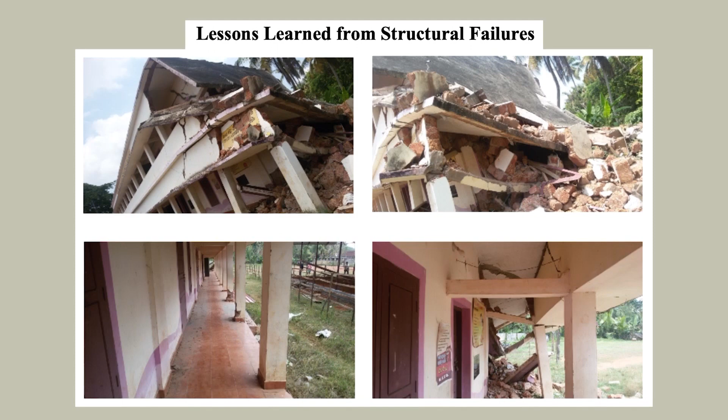RCC is not there, no kind of reinforcement is there, no concreting is there, but only clay bricks. And the columns failed under shear failure. The beams are of very thin cross section. The reinforcement, steel reinforcement given in the beam was not adequate. So we can say plenty of reasons like that.

And in addition to this, before constructing the foundation, they removed a tree from the place. So that gap was there. Refilling the place where the tree was initially standing was also an additional problem. So in short, the entire building came to earth because of several reasons.

One, the soil was not considered for design. Second, a design which was available elsewhere was brought to the place and executed there. Third, there was no kind of structural design. The columns were made of bricks. The beams were not adequately reinforced, and slabs also were not adequately designed. So we can say plenty of reasons just like that. This is a typical example of structural failure which happened in the place.

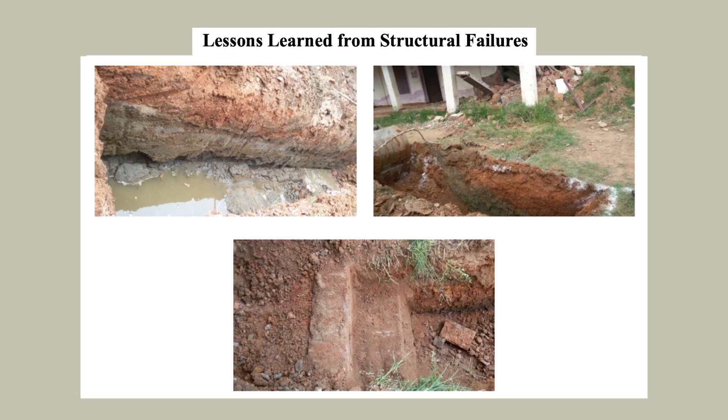You can see when the place was dug down for the soil investigation, the top 60 centimeter to 1 meter layer was red earth filling. Below that you can see a dark color. The dark color is dark clay, and you can see the water table also, which is very high in that place. And in the third photograph, we can see the inverted T-beam foundation, which was of course inadequate for withstanding the load coming from the superstructure.

So this kind of construction has been practiced without much engineering in the place. If you look at the residential buildings constructed there in the recent past, you can see that the foundation is not going deep into the soil. Rather, the foundations of those buildings are standing on the top soil, considering that the top soil is better than the soil below. But without much anchorage, there is every possibility of washing away or toppling down of the structure.

So some of the possible causes of failure of structures, based on this example and other examples available in the locality, may be summarized in the following lines. Wrong choice of land for construction. Many structures are constructed in floodplains. Many structures are constructed in places which should not be chosen as soil for construction. Without adequate soil stabilization, people go for construction. So wrong choice of land for construction, that is one.

Then settlement of soil below the foundation and differential settlement of structures. That is a very common phenomenon. Settlement will be there for structures for sure, but if the settlement is different from one point to another point of a structure, the structure is going to fail for sure. The structure will tilt and there can be cracks in the building, and finally it causes failure of the structure. So this is a major cause of failure.

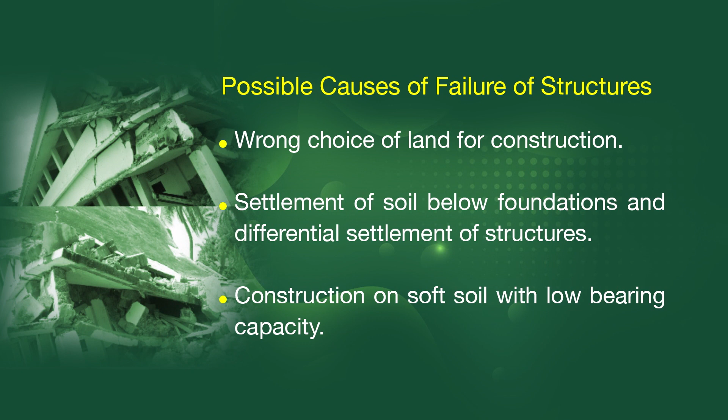Construction on soft soil with low bearing capacity. As we saw in some of the previous segments, the soft clay available there did not offer much bearing capacity to loads. So if you construct buildings on such clay without any soil stabilization, there is every possibility of failure.

Then construction on top soil without much anchorage of the foundation, that is what I was mentioning in the beginning. On the top soil, they construct the buildings after ramming, thinking that sufficiently ramming the earth is good enough to give a good bearing capacity. But the compaction of soil may be good in the beginning, but consolidation is not taken care of. The pore pressure is supposed to go off and the soil will consolidate.

The grains will stand close to each other after pushing away the pore water and the pore gap in between. So that process will take time. It will not happen immediately. So if you fill a particular site and construct the foundation immediately above that, there is every chance of consolidation settlement and building failure.

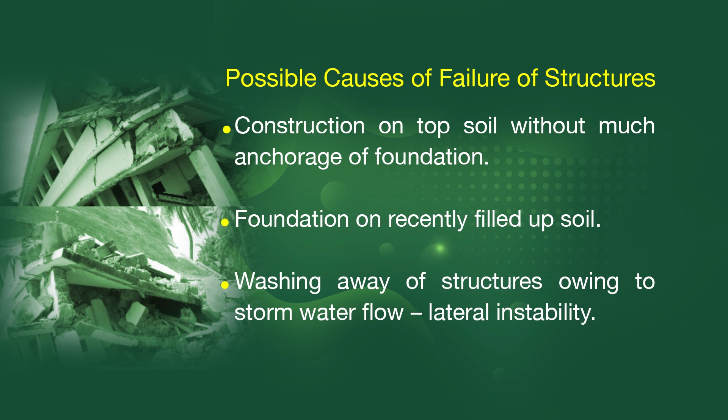Foundation on recently filled up soil. This is also added to the previous statement. Then washing away structures owing to storm water flow, lateral instability. So when the structures are constructed just above the soil without having any kind of anchorage, when there is storm water flow, there will be seepage of soil below the foundation, and every possibility of failure of structures can happen. So the structure may tilt and it may fail.

Then sometimes some of the buildings are having water absorbing building materials. This also was noticed in the place. During several inspections, this point was also noticed. Many of those building materials which are used may be having water absorbing property, and owing to water absorption they may become soft. That is also a cause of structural failure.

Then nowadays people are extensively using RCC, reinforced cement concrete, but without any kind of design based on IS codes or detailing. They use RCC for their foundation, they use RCC for their superstructure, they use RCC for the roof also. I inspected one building at one point of time, and I wondered about the amount of load which they have put in the RCC structure over there. They thought that if you add RCC to the structure, that may strengthen the entire structure.

So there was a 90 centimeter thick foundation given with RCC. Do you believe this? 90 centimeters thick RCC, and so much of reinforcement. Reinforcement was very, very heavy, without any design for sure, but heavily reinforced structure. And above that, they constructed the building, the superstructure, and the roof also was RCC roof. They confined the boundary also with a strong compound wall, and inside the compound they have laid granite tiles or other kinds of tiles. So fully tiled compound.

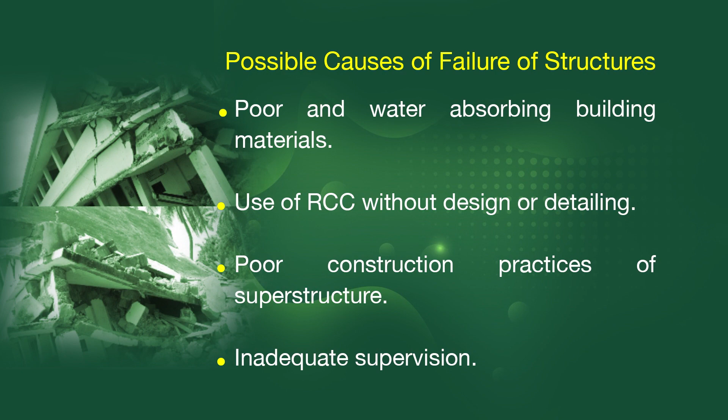Then of course poor construction practice of superstructure. We may look into the facilities which we require in the superstructure, the function of the building, but not the structural strength of the building. And finally, the structure is supposed to transfer the load to the foundation and to the subsoil. So this fact is also not considered while designing the superstructure.

Inadequate supervision: even if the structure is designed by an engineer, unless there is supervision by the same engineer or somebody else throughout the entire construction period, there can be faulty construction practice, and finally that may also lead to structural failure.

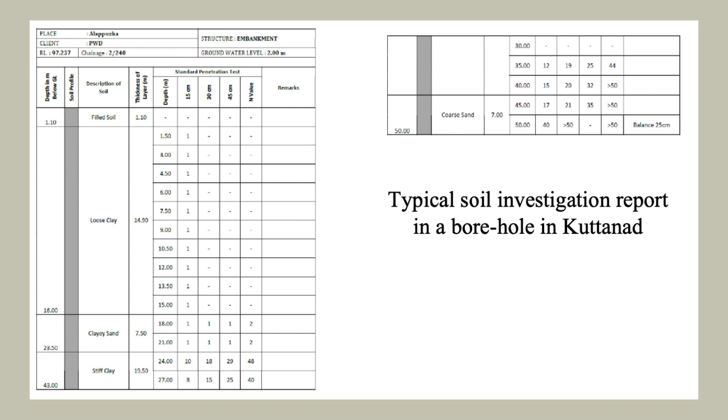Now we can see in this slide a typical soil investigation report of a borehole in Kuttanad. You can see in the top 1.1 meter or so there is filled up soil, and below that you can see loose clay having a thickness of 14.9 meters or so.

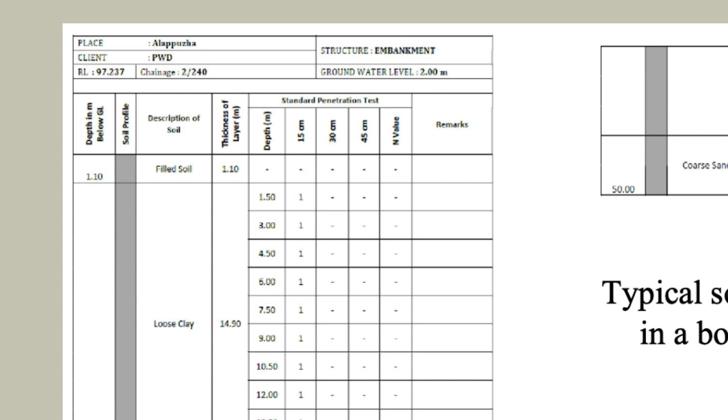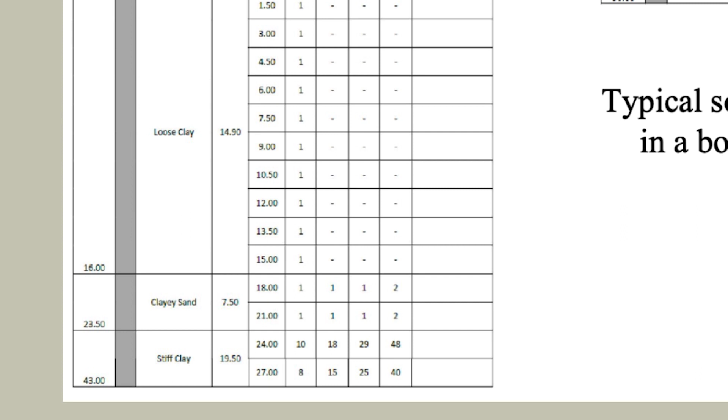Below that you can see clayey sand of thickness of like 7.5 meters or so. Then stiff clay is below that, and you can see hard soil just below that. So, this is a typical kind of a soil investigation report in a borehole in Kuttanad.

The N value, the standard penetration test values, are also reported in the particular chart, but you can see in the first and second layers they did not report even a standard penetration test value, because the hammer is just going down just like that without having even a single blow. So, the number of blows required for 15 centimeter, 30 centimeter and 45 centimeter penetration is treated as the parameter for this N value or the standard penetration test value.

But even with only a single blow, the hammer is going down this much penetration in the top, like 15 meter or more than that depth. But below that you can see the hammer penetrates through that much settlement by 2 blows in the next layer, that is the 7.5 meter layer. Then further when you go down, you can see the number of blows required is more than 40, and finally when you go deeper than 40 meters in the particular site, the number of blows required is more than 50.

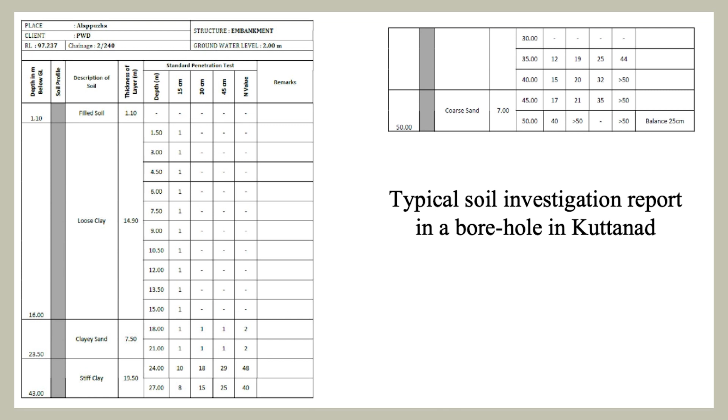And when the number of blows is more than 50, we consider that particular layer as a hard strata, and the foundation can be placed on that layer. That is part of civil engineering.

Now, another typical example is given here, where on the top soil you can see a few number of blows for that much penetration. There is also filled up soil, and black clayey sand is there as a second layer. Then loose clay is there as a third layer, which is much thicker, and stiff clay is there, and finally you can have a much harder kind of strata. Here also hard strata is available at more than 40 meters depth. That is the point which I was trying to bring about over here.

Now, if you look at the soil investigation report of some other sites, you can see that after going down by a distance of 10 meters or 15 meters, there is a 3 meter or more thick layer of shell deposit, and that shell deposit is much good in bearing pressure or bearing load from the foundation.

So, in such kind of sites, many a times buildings of 3 stories or more are founded on that shell layer. At the shell layer, usually the N value or the standard penetration test value is more than 30, more than 40, of that order, and that is sufficiently good for having a bearing capacity of like 150 to 240 kilonewton per meter square.

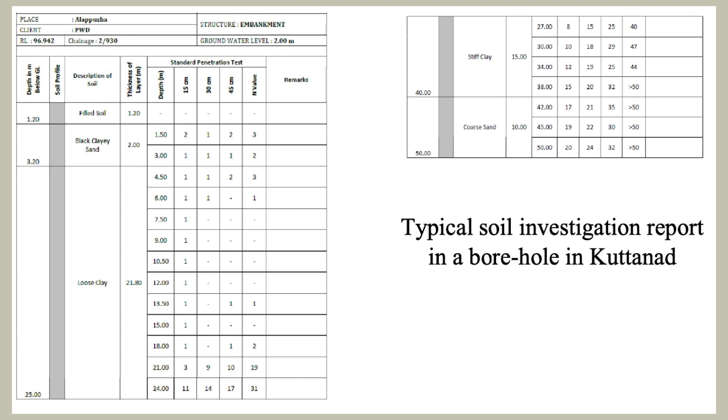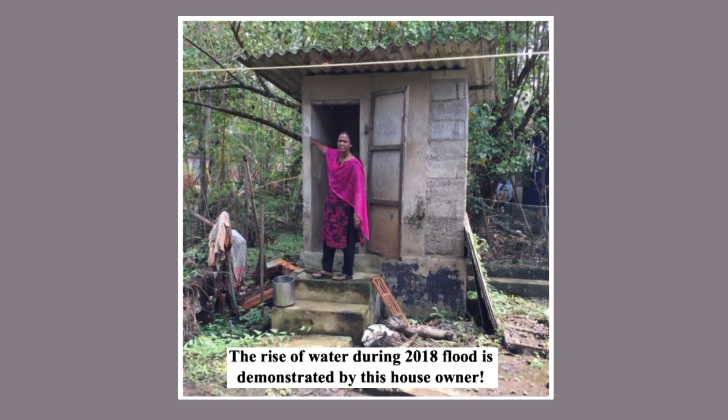All right, now typical case studies are going to be explained in the next segment, but here you can see when we visited a site in Kainakary, which is one of the low-lying places in Kuttanad, a house which was fully demolished during the 2018 flood. Nearby the house there was a toilet block, and this woman is showing the level of water rising during the 2018 mega flood.

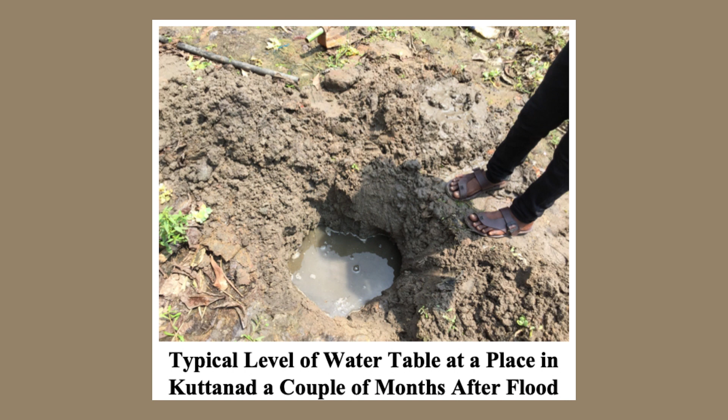And at the same site, when we tried to dig down, the water table was available up to a depth of 30 centimeters or so. This is done during January. So, water is available if you dig down by a small depth.

So, based on the observations which we made in different sites, and based on the parameters we identified with regard to the causes of structural failure, certain protocols are being proposed for resilient construction to live with water. You cannot avoid water for sure over there, but you can have some resilient construction practices. So, those construction practices are supposed to be simple, they are supposed to be borrowed from indigenous technologies and some adaptable technologies also.

So, the prime thing is recently reclaimed land, river basins, wetlands or places prone to landslides should be avoided for construction. Well, the term landslides may not be applicable to Kuttanad, but it is applicable elsewhere. It is a general statement. It can be adapted in any place in the world for sure.

So, recently reclaimed land cannot be used. River basins, wherever the water is supposed to flow, are not supposed to be used. Wetlands should be avoided for construction, or places which are prone to landslides, they are supposed to be avoided for construction.

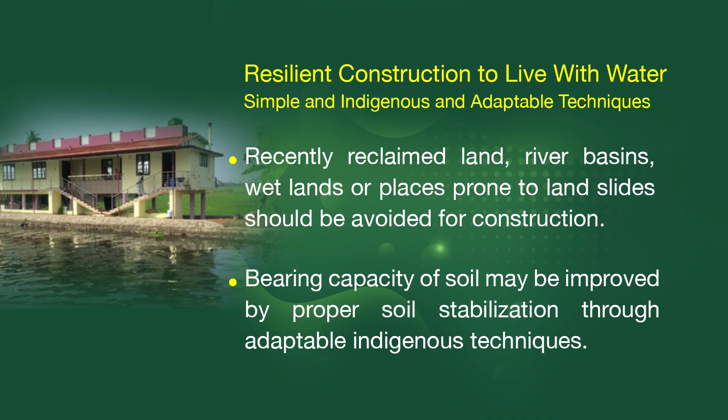Then the bearing capacity of soil may be improved by proper soil stabilization techniques through adaptable and indigenous techniques. That is the prime thing which we have attacked through our projects. So the soil stabilization techniques were done through certain adaptable as well as indigenous technologies. For example, bamboo piling is one among them.

Bamboo is a plant which will grow in water, which will stand in water without any kind of decay. Coconut trunks also stand in water without any kind of decay for long years. Then coconut shell can also be used as a soil stabilization technique. Well, this is actually borrowed from the bund construction techniques which we have seen in one of the previous segments. So I will explain such kind of techniques along with certain case studies in due course of time.

Now, loads on structures can be distributed to a large area where soil depicts low bearing capacity. Well, that is a very important thing. Wherever there is possibility of low bearing capacity of soil, you can increase the breadth of foundation, but that is to be designed. How much the breadth or width is to be increased for the foundation is to be designed based on the soil bearing capacity at that particular site. That depends upon site to site.

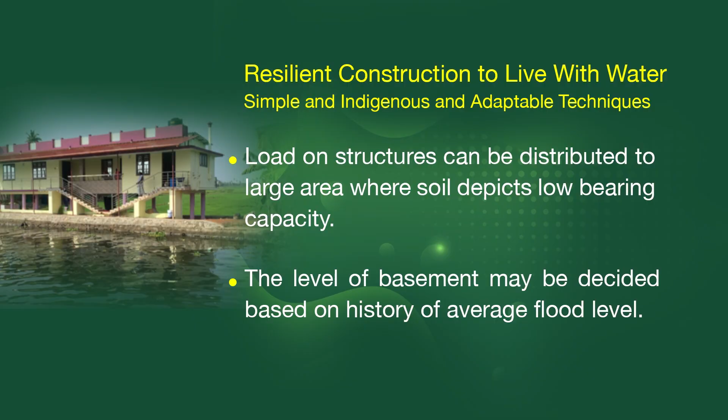The level of basement may be decided based on the history of average flood level. You would have noticed that in one of the previous segments we have discussed the adaptation of the people who were living in Kuttanad earlier. They constructed their elevated plinth, they constructed their mezzanine floor to be adaptable with flood. Whenever the flood comes above their plinth level, they stayed in their mezzanine floor till the flood recedes. So they can have a kitchen also in the mezzanine floor above, and they can stay there happily, they can live with water.

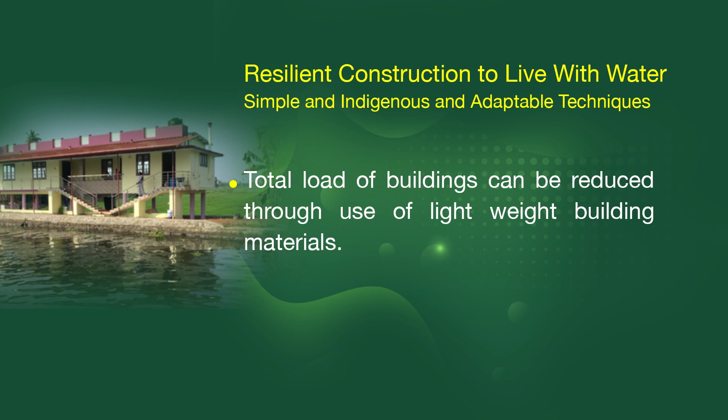So the level of basement which is constructed for new buildings can be decided based on the history of the average flood level, not the maximum flood level, for sure. Total load of the building can be reduced through use of lightweight building materials. Nowadays AAC blocks are available, so you can use such kind of building blocks, but not for load bearing, of course. Load bearing structure can be a different one, and filling structure can be these aerated blocks. But the total weight can be reduced because of the use of such materials.

There are certain school buildings which are constructed in Pulinkunnu, in Kuttanad, so that the total weight of the structure is reduced by 70%. 70%, you don't believe that. You can see such kind of improvisation after the 2018 floods quite commonly in the place.

Elevated plinth for sure, through stilts, through columns. But unless the stilts or the columns are designed properly by an engineer, there is every possibility of shear failure. That is, one column offers very much load to the soil below, and if the soil below is very weak, there is every possibility of settlement of that particular soil. The column may go down, and accordingly there will be differential settlement for the entire building. The building may come down.

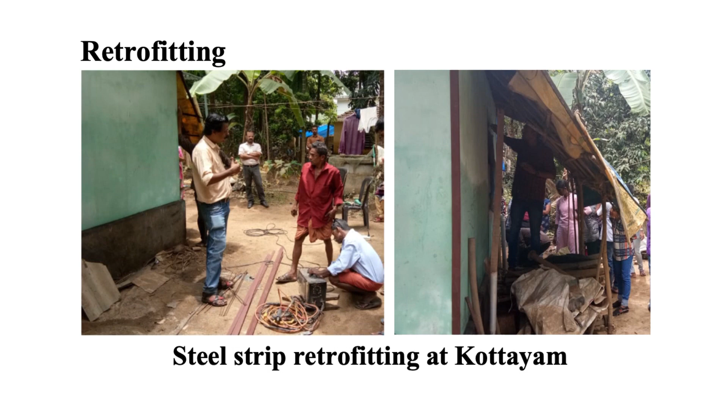It happened in Kottayam, not in Kuttanad. It is part of Kottayam only. So, because of settlement of the structure, there were cracks in the building. Cracks would be vertical, cracks would be horizontal, cracks can be inclined also. So, the building was a masonry structure, and you can tie the building with vertical as well as horizontal steel bands.

So, these steel bands are going to tie the entire building as a single unit, and when you tie it up with screws and things like that, the cracks are going to close together, and later development of cracks, widening of cracks, can be avoided in such buildings. So, this kind of retrofitting also can be done. So, these are some of the resilient protocols for building construction in the place.